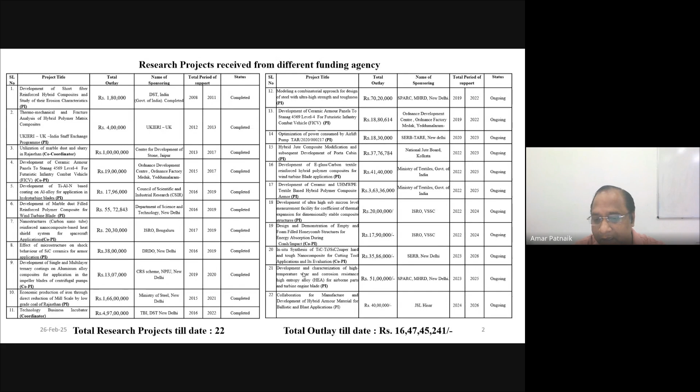Most of our work is the development of materials only. It may be defense application, it may be wind or hydro turbines, or it may be dental applications, or hip prosthetic applications, or it may be for ISRO for space blade applications. So in almost all the cases, whatever you say, these are the development of new materials. Mainly our work is the development of materials only.

So there are a few relevant projects, and we'll discuss not all of them, just I will go through it. One of them, we can say, for Ministry of Steel, that is one of the dream projects for them - it's development of iron particles, specifically nano irons, from low grade coals only, which we have developed.

At the end we'll discuss another project, that is DST, specifically for applications of SPARC, a combination governed by Ministry of Education. It's a SPARC International project, and here again we have developed some new steel material. It's a steel already there in the world, but it is a slightly new steel material, and it is more harder, specifically developed for shock absorbing applications only.

And then another application, this is for ISRO, that is for thermal measurement of conductivity, specifically thermal expansion for small samples. It's at a sub-micron level, you can say. It's very tough. We are developing that equipment in our laboratory so that it can measure the thermal expansion, and this is an ongoing project.

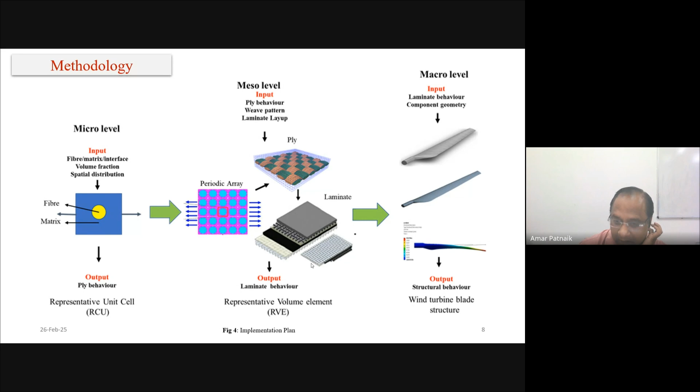It fails in terms of thermal, it fails in terms of mechanical, it fails in terms of surface, that is erosion. So these are the things we are doing in simulation also. We did it. So this is the model we have developed. Those who aspire to work in this area or are planning to apply for projects to different funding agencies should try to concentrate on these things: what exactly is going on at present and what new things we need to incorporate so that it can be an achievable project.

So we started with a model, that is an erosion model. Generally, in simple terms, erosion is a surface loss, because the surface is eroded. It's just like a sand blasting technique. So the surface is damaging. Once the surface is damaged, the failure will start from there.

Once the surface is damaged, the exact energy that is required will not be obtained. So that's the biggest problem, how we can save the life of that blade beyond the desired period. In general, in Rajasthan, the life of blades is at most 1 year, not more than that. So we have to enhance that, at least to 1.5 years, so that we can save the maximum cost. So this is the model we have developed. It is generally a kinetic energy model, because it is the impact of a particle on the surface.

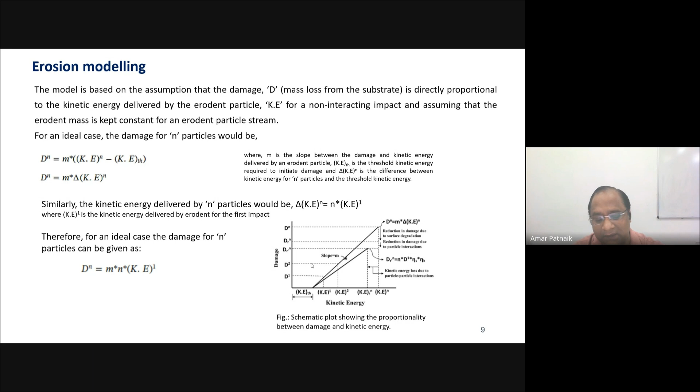So this transformation is very important to know about, specifically for materials working on energy applications, specifically on wind energy. So here the technology is that we need to find out how much it can balance in terms of the velocity as well as the particles.

So in general, whenever we go for a model in simulation, it comes one particle at a time. But in reality, it's not like that. In reality, maybe thousands of particles come at a time, or maybe 10, 20, 100. There is no limitation, and it is difficult to measure or understand how many particles are coming at a time. So in simulation, we can strike at least one at a time only.

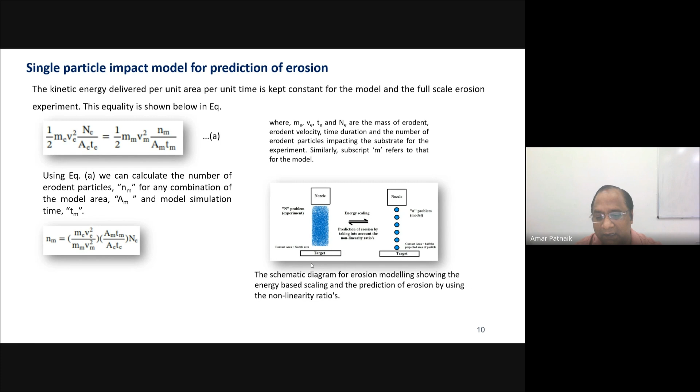So through this, we can see how the particles are striking. In general, we can consider the particle is spherical, that is a sand particle. So it strikes the surface continuously. Once it strikes continuously, the surface damage will take place. So this is one of the failure mechanisms.

There are other factors. Those who are working on tribology, they can say it is a damage. Those who are working on mechanical, they can say it's a failure of the materials. Or those who are working on temperature, they can say it is a grain effect of the materials. So the thought process is different, but the outcome is finally the loss of materials.

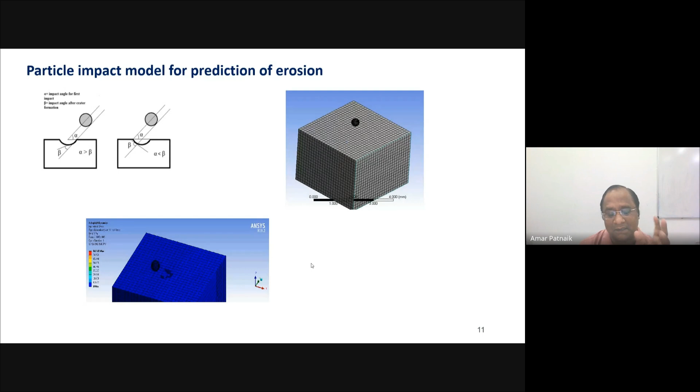We studied both experimental and simulations, and the graph pattern is exactly the same. So through that we can say that at a particular angle, the loss is maximum. What to do? We need to avoid that particular angle. Because at present the design of wind blades is not the steady type of 10 years back. At present you can automatically adjust the head of the wind blade.

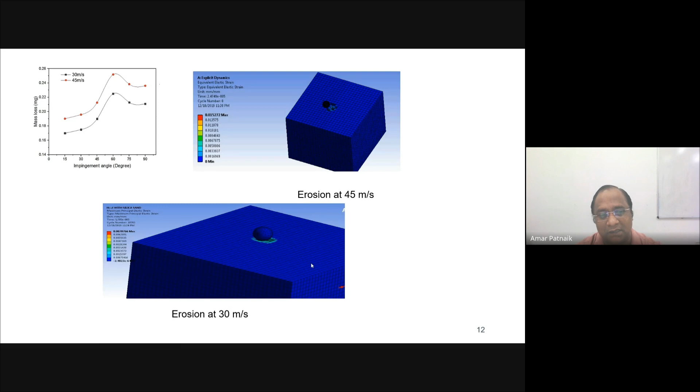So by these results, we can say that the particular angle we should avoid, so that we can reduce the damage, because loss is an unavoidable parameter. We can't say there is zero loss, but we can reduce that loss. So it is important to know which angle has the maximum losses.

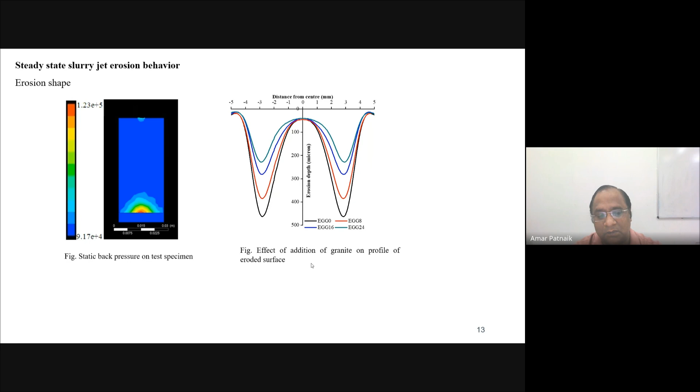So similarly, the erosion pattern, specifically for slurry erosion applications. This is one of the applications through which we can say how the graph pattern is, at which angle it is maximum and at which angle it is minimum, and where the loss is maximum. We need to understand those things. So accordingly, you can develop the material.

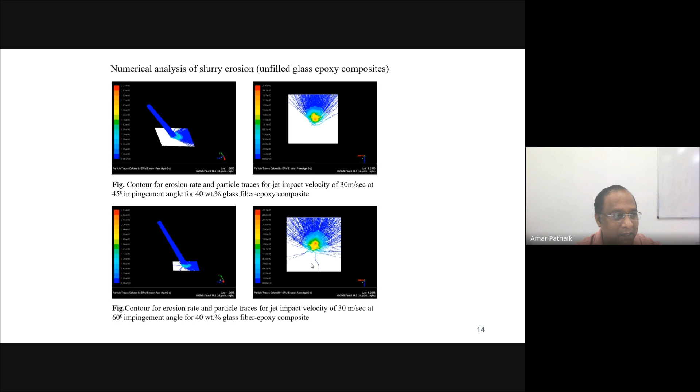Different sand particles, how it strikes the surfaces, damage is taking place. And once you know it at different velocities and different angles for different properties of fibers, different percentages of fibers, then at the end, once you optimize things, we can go for development of materials experimentally. This is one of the experimental results, and simultaneously the simulated results also.

So the same thing at a particular angle, let the angle be 30 degrees or 45 or 60 or 75 or 90 degrees, different angles. Here we observe that this particular fiber, it may be any fiber, but this particular fiber is a synthetic fiber. This fiber at 75 degrees, the loss is maximum. So these things we can study.

Those who are good in material science can study these things through a scanning electron microscope also. And the same thing we can observe with the help of simulations also, because it is not possible that the facility is there each and every time. We can do the same things by other methods, that is through simulations. So this is a valid pattern showing which angle has maximum loss and at what particular velocity, so that we can avoid that. This is totally new to the system

in case of wind applications, where most of the time we are going with a scanning electron microscope only. There we can know the surface property of the materials, how the loss is, whether cavitation is there, plowing is there, micro plowing is there, or any fracture of materials, or damage of the composite surface is there. The same thing we have observed through simulations also. That is a very good thing.

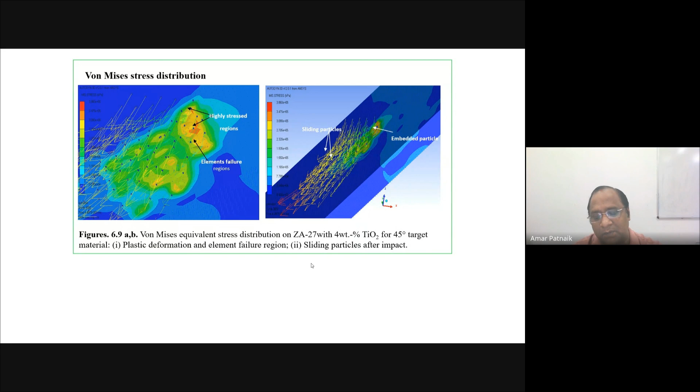Now the next project is specifically for defense applications. We'll go from here to the end. It's purely on defense applications.

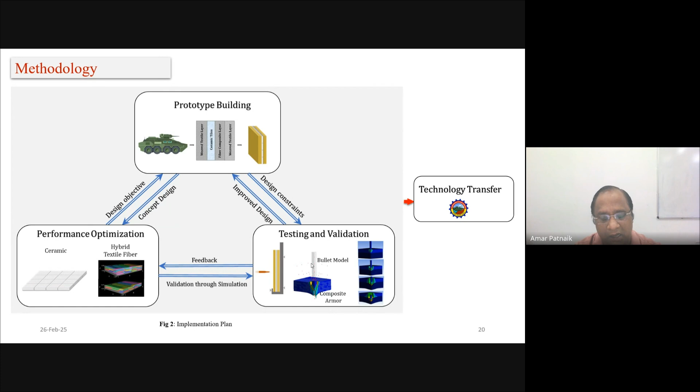So here the target is, because the Government of India's major focus at present is defense, we need to reduce the weight of the materials. Till 2010 we have developed the material. It is nearly 36 kg. We have reduced from 130, 140 kg to 36 kg. Now our target is hardly 12 to 15 kg, not more than that, by these methods only.

So this is one of the techniques. There are a lot of techniques for fabrication of materials. This is one of the techniques, VARTM, generally you can say it is vacuum assisted resin transfer molding technique. We have developed this equipment in-house here, and it will work in a controlled environment.

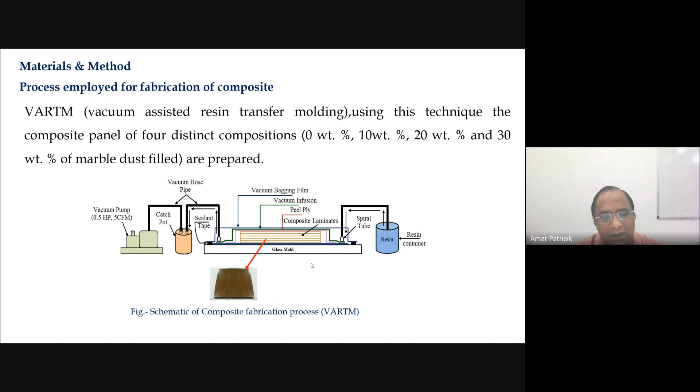That means vacuum as well as pressure. That is the controlled environment. It's not temperature. I will show you another equipment where it will work with vacuum, temperature as well as pressure. But this is only a vacuum as well as pressure environment. And we have developed this in-house for these ballistic applications only.

So these are the weaving patterns of different fibers. These are the different fibers we developed. This is the simulation. We did simulation through TexGen initially, for the design parameters. And the rest are the original weaving pattern fibers. NITRA is one of the agencies in India that is very good for weaving of fibers. As per our design, they can weave the fibers because they are a partner of this project.

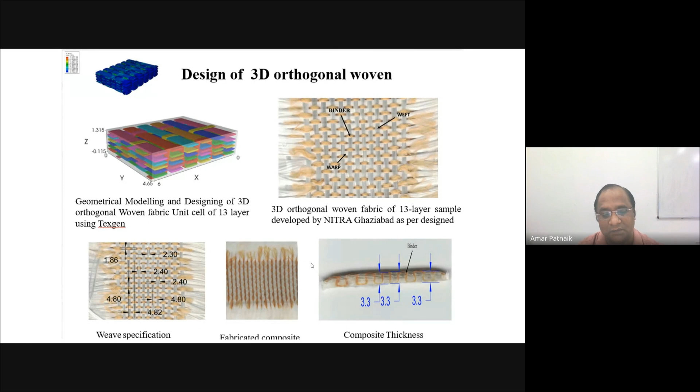And through simulation also we have studied which fiber is good in which direction, because we are taking 3 different fibers in this particular application. This is glass, carbon, and UHMWPE, that is ultra high molecular weight polyethylene fiber. These fibers are very good specifically for defense application, that is ballistic as well as shock absorbing materials. And this fiber pattern we have designed through simulations. After that, we have performed the experimental work.

So the bullet is like this. You can see the image, that is the simulated image, of how the bullet is penetrating the surface. So there are different images. We can understand through this image how much it will penetrate inside the body structure, because first of all it should not penetrate 100%, and there should be some deflection, maybe 3 or 2 mm, not more than that. This is the boundary condition.

And through this we can observe which fiber will absorb more energy, because glass is slightly different. Carbon fiber will absorb energy faster, whereas UHMWPE is late because it has an elastic-like nature. So through simulation you can understand which fiber to put in which direction.

As per our weaving pattern, carbon fiber, glass fiber, and UHMWPE, 3 things we have taken. UHMWPE we have considered as a binder, and in the X and Y directions we have selected glass and carbon fibers. And this is the weaving pattern of these fibers, so that we can understand.

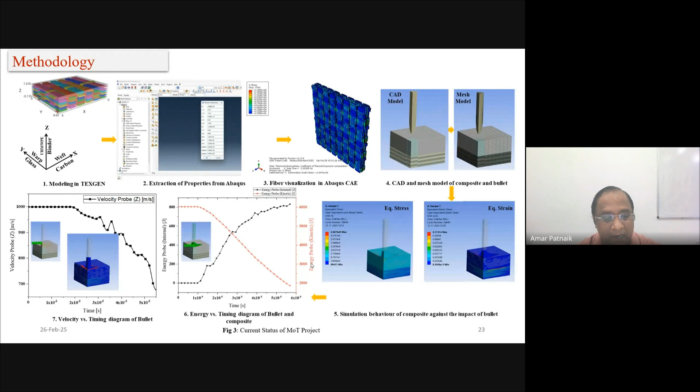So these are the different graphs, the energy versus the time, so that we can know how much time it will take to penetrate into the body of the armor panels. These are the energy versus time diagrams of the bullet as well as the composites. And these are the simulation behavior of the composite against the impact of the bullet. You can see that only the surface is slightly damaged. It's not like it will 100% penetrate into the body of this armor.

So similarly, whenever we go for this type of research, we should know the behavior of the bullet materials. Generally, you can say these are FP bullets. And here, see, we have started with different combinations of fibers: glass, carbon, UHMWPE, and glass, carbon, UHMWPE in reverse. So nearly 9 different permutations and combinations we have performed.

And here, what is the benefit of it? The most important is the cost benefit analysis. So the benefit is that we can improve the efficiency, because impact energy is the major factor as far as ballistic application is considered, and simultaneously we can reduce the weight of the materials. That is more important, how you can reduce the weight of the armor so that someone can easily hold it and keep it there without a crane. So if it is 12 or 13 kg, anyone can hold it and keep it, because there are holders in 4 positions: left, right, front and back. In that holder we can keep the armors.

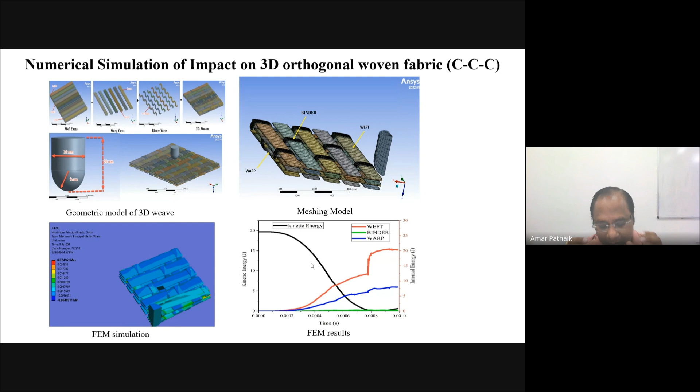This is how the armors are looking. And there are different combinations. You can see the total kinetic energy and the individual ones, the binder, which one is better, and the warp internal energy. For all these, we need to find out the energy first. Through this energy, we can say whether XYZ fiber is good or bad. These are all simulated results. This is not experimental.

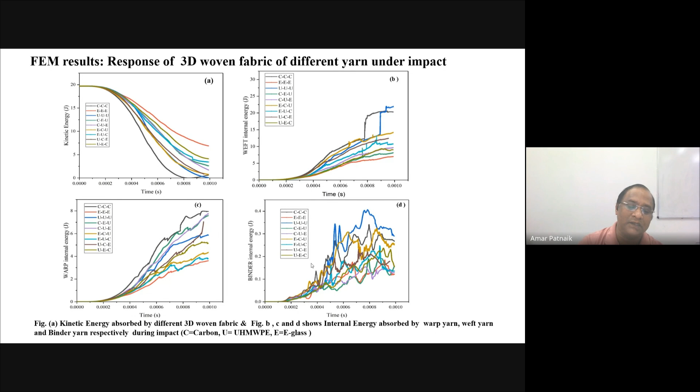See the combination CCC, which is carbon, carbon, carbon: in the X direction carbon, in the Y direction also carbon, and in the binder direction also carbon. Like this EEE, glass fiber, glass fiber, glass fiber. UHMWPE, U. And carbon, E and U. Like this, there are 9 combinations. Through these 9 combinations, we have to optimize which fiber we should keep in which direction.

So we ranked them through a hybrid optimization technique, TOPSIS, which is one MCDM technique, a multi-criteria decision making technique. Through this technique, we have optimized the data. We have taken the weaving pattern of the fibers, simultaneously their energy, that is how much kinetic energy is absorbed, as well as the warp internal energy, binder internal energy, and the property of the material, that is the density of the warp, density of the weft, and density of the binder.

Density is one of the major properties as far as composite is concerned. If it's best fabricated, there is a free structure, meaning there is no failure or porous structures in the material. That's the reason we need to consider density as one of the measures.

There are other factors too. It's not like density is the only one. Other factors like hardness we can also consider, some mechanical properties we can also consider. If you think about this particular armor, if I can use it in minus temperature, then we can take temperature as another factor.

But as this is totally designed for the Indian environment, we have considered only up to temperature up to 60, not more than that, because more than that is not required. So this is the environment we have optimized on. In these combinations, below the graph we can see that UHMWPE is the best, that is rank 1. Then carbon, carbon, carbon, then other combinations are there.

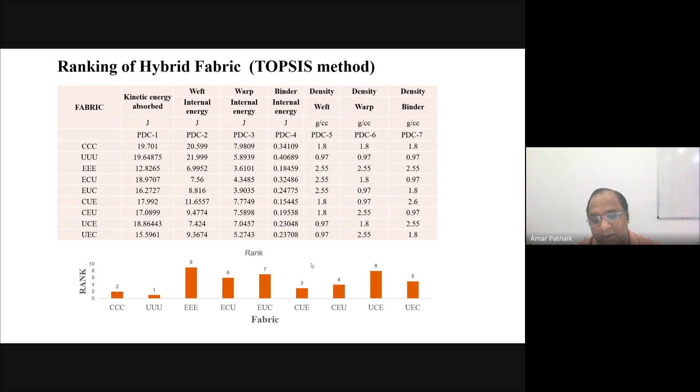Similarly for polymers, one of the basics is curing, which is important, because if it is not cured properly, there are chances of failure of materials. One of the failures is because it is a combination of metal as well as ceramics, so there are chances of failure by delamination. So to avoid these things, proper binding is also important.

That's why this equipment is available in our laboratory, and through that we can apply high pressure, high temperature, nearly 200 degrees centigrade, as well as load. Here load is pressure only, there is nothing like manual load, we put it in a vacuum environment with pressure as well as temperature only.

It will cure for 12 hours or more, based upon the curing of the resins, because some resins may take 3 hours, some may take 4 hours, and some resins may take only half an hour. So we need the duration to generally be more, so that it can properly mix, and we can prepare it finally. So this equipment is generally what you can call an autoclave.

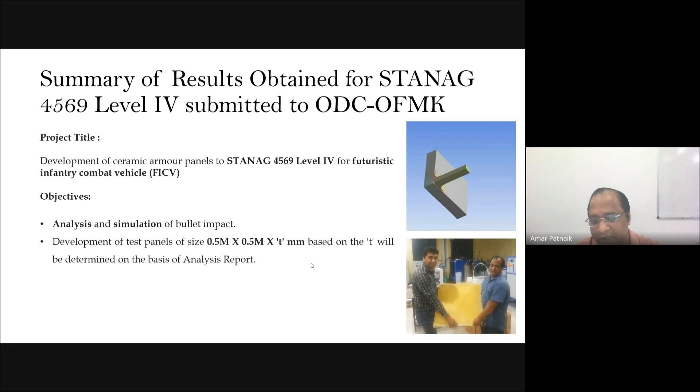Specifically, the material is what we have developed here: pure glass and composite, along with the ceramic, which we have considered as alumina, and some others. This is the bullet we have used for these STANAG applications, a 14.5mm API bullet, the B32 series. Our ceramic is Al2O3 ceramic, along with a glass fiber epoxy composite.

This was our first project, from 2015 to 2019. We worked on this and gave a positive response and results to them. This is totally a weapon application, meaning directly for vehicles. It's not like we will go for some other test; these are already tested materials, specifically for Level 4.

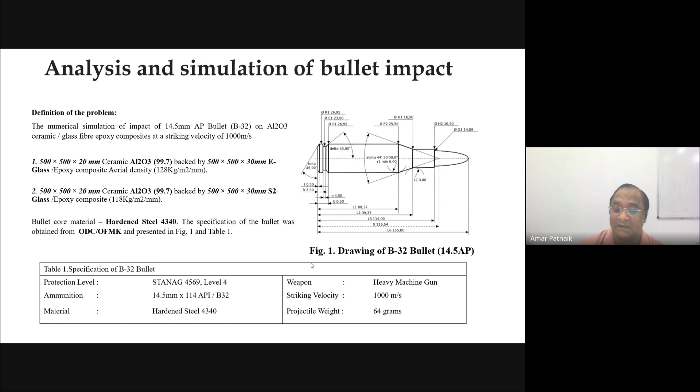The projectile weight is 64 grams, and the striking velocity is 1000 meters per second. These are the models we developed initially.

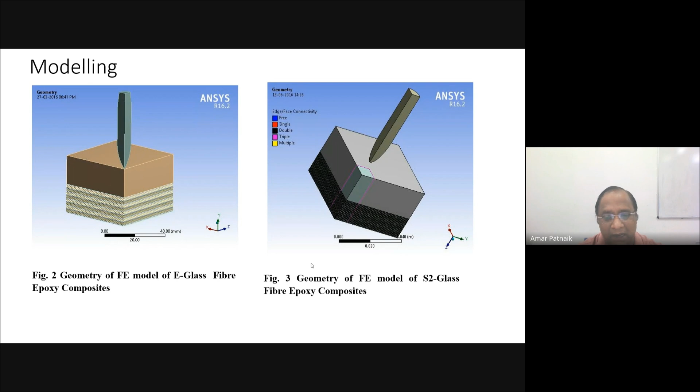These are the geometrical models, using e-glass fiber epoxy composite. Through simulation we can do nearly 70 to 80% of the work. So one should be very strong specifically in simulations, because cost and time are both important. Through simulation, I can reduce the cost as well as time, and also understand the behavior of the materials in everything.

Accordingly, we can understand where I need to put my material. It's not necessary that every time I will go with D as 0 or D as 1; D may be between 0 to 1, but the damage pattern variable always lies between 0 to 1. So this is a linear equation of state, and it satisfies Hooke's law also, because anything we develop should satisfy our basic equations.

Similarly, this is a shock equation of state also. Once it strikes the surface of the ballistic material, we can understand how much shock energy it will absorb. That's why we use the shock equations of state, through which we can understand how much it entered into the armor panel, how it strikes and reverts back, and in some other directions. We need to know this, so we use this specific equation.

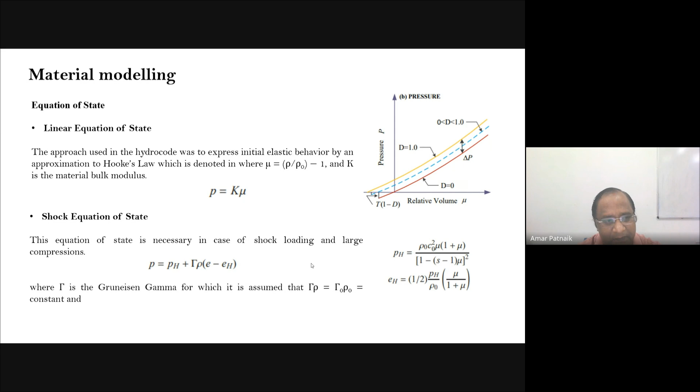Similarly, these equations are all material models, because in simulation there are the material model and the failure model, two things. There are different material models; one can find out the material model through the linear equation of state or shock equations of state.

Again, the materials model only, but we need to find out the strength also, because that will feed into the previous two equations, like equation of state and shock equations. That will determine the damage behavior of the materials only. Damage is one of the parameters.

These two equations, Johnson-Holmquist 2 and Johnson-Cook model, both are strength parameters. Whenever we go for tensile strength, we need to know how much tensile strength, flexural or bending strength, interlaminar shear strength, or impact strength the material has. Similarly, for ballistic applications, these strength models are there. No doubt it is an empirical model, but...

Nearly you can say that if your model is perfect, CAD design is perfect, nearly 95 to 100, nearly 99.99% accuracy you will get if the materials model is perfect. Otherwise, because there are different ways to model the materials. If the material model is perfect, then it is easy to understand the behavior of the material.

Otherwise, it will fail 100%, because if the CAD model has some defects, or the proper boundary condition is not there, or the nodes and elements arrangement is not proper, it totally depends upon that, because ANSYS is a black box. It could not understand anything on its own. The way we arrange it, it can understand things only. So the CAD design is important.

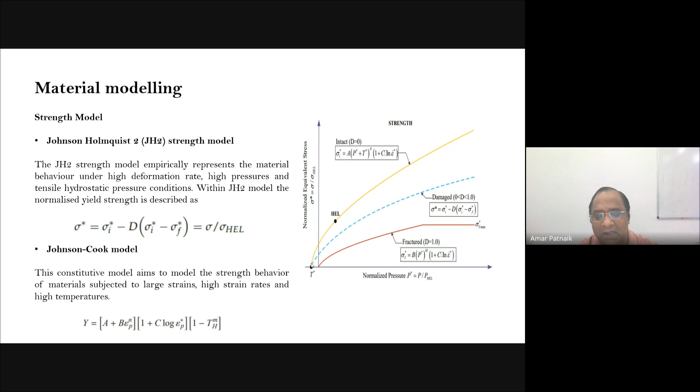So in strength, how will we calculate it? If it is the red line, it is a fracture, or it is damaged, lying between 0 to 1, maybe 0.7, 0.3, 0.5, or it is D=0, then you can say it is intact. These are the three things we can find out through this materials model.

Similarly, a failure model is there, because once you know the damage of the material, then through failure models, which is an advanced Johnson-Holmquist model, we can find out the failure of the materials. It is a graph between the pressure as well as the fracture strains only.

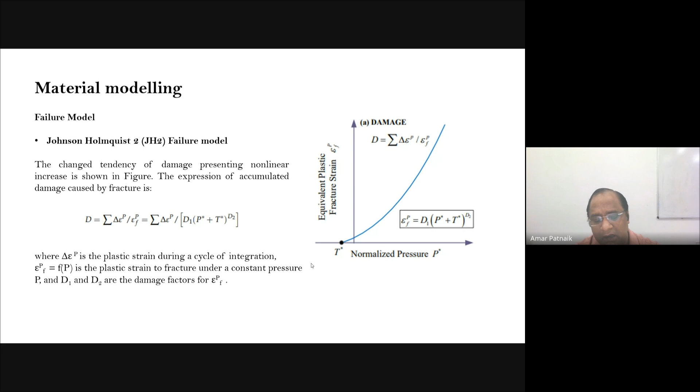And the tendency of the damage, we should know, depends on the behavior, just like whether the projectile impact is at a 45-degree angle or 30-degree angle. So it depends upon that only. We can find it out totally based upon the plastic strains only, that is the strain energy principle. This is the failure models of different materials.

Similarly, failure models, not necessarily I can go with just one, so here is the Johnson-Cook failure model. This type of graph we already learned through material science, that is whether a material is brittle or ductile. The graph is like this only, this is the Johnson-Cook failure model.

If it is up to point A, then damage initiation is there, then damage evolution, and finally it fails completely. That is through the strain versus stress curve only. So we can find out the behavior of the material.

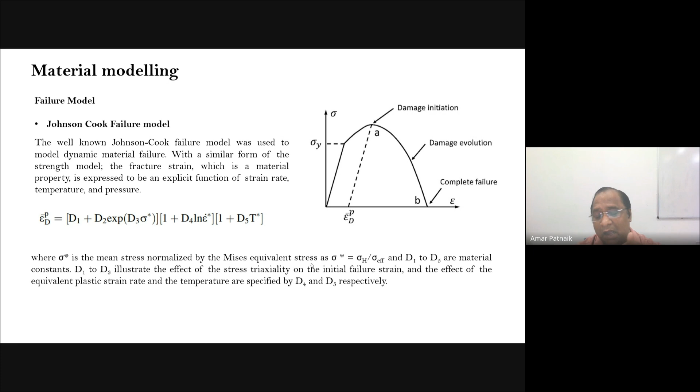Through that we can say this graph can explain what further modification is required in that material. That is more important, how you can modify that material. If it reaches damage initiation and there is no further growth, it's okay. Then damage evolution is there, then complete failure is there, then we need to rethink how we can change the materials or the behavior or the applications of the materials.

So these are the tested results. The top left one is the panel we have developed. All top three we have developed in our laboratory, and we have tested them in the Ordnance Factory Medak. And see, they struck the surface of this ballistic panel multiple times.

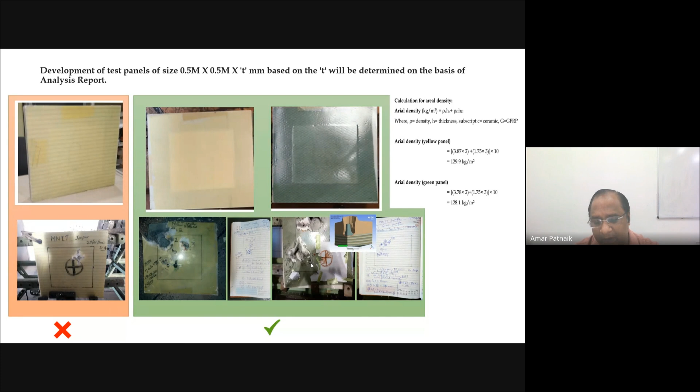The main point is that whenever anyone works on this particular type of material or this type of application, one should know the density. Here the density is the areal density. We need to find out the areal density, because ballistic applications depend only upon the areal density, no other density. Based upon the areal density, I can say which is lighter and which is heavier. So their calculation is only in terms of areal density.

See the green panel, the areal density is 128.1 kg per meter square, and for the yellow panel it is 129.9. So the areal density of both panels is nearly the same, but the materials are different. One is the green panel and the other is the yellow panel. The materials are slightly different, but the areal density is nearly close.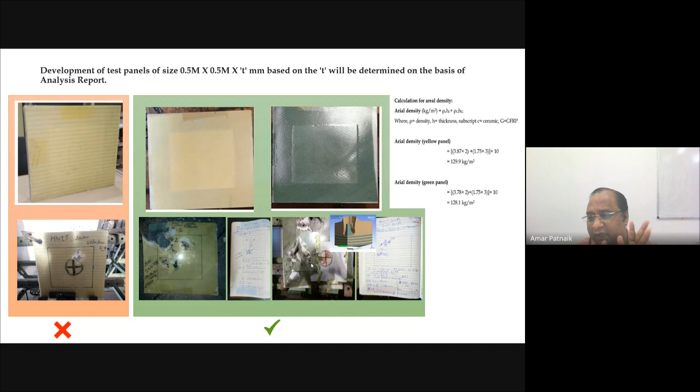So this is again through this test: we have developed a panel of B4C, that is boron carbide, and Kevlar fibers.

See, that's because I am not feeling well also.

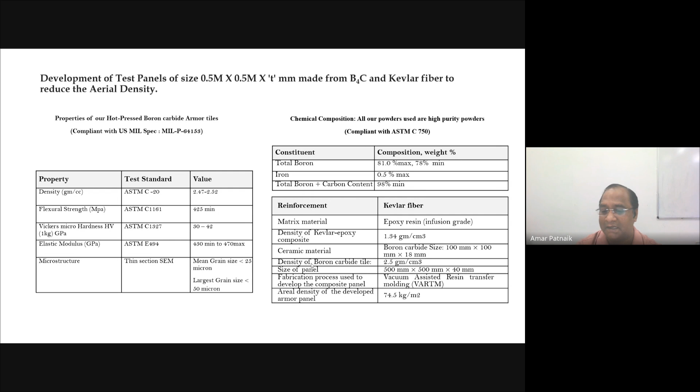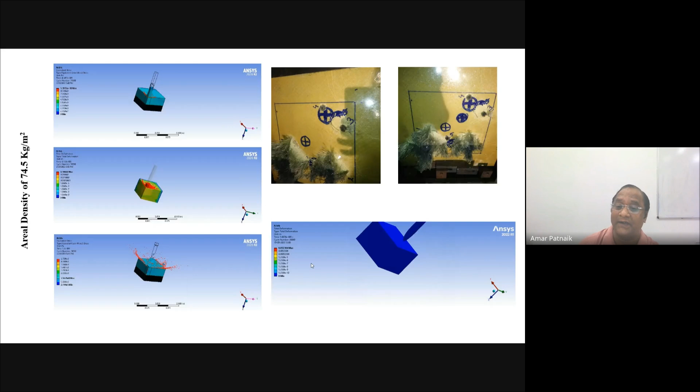The ceramic material we have considered is boron carbide, the size of the panel is 500 by 500, and the areal density is 74. See, in the previous one the areal density was 128. Now the areal density is 74.5. Further, our target is to reduce that areal density. So these are the different experimental results.

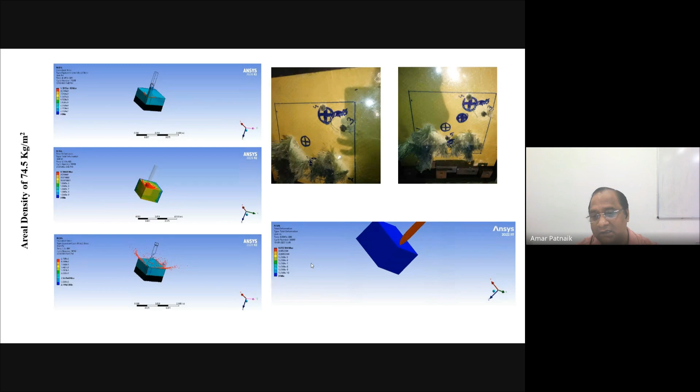The right hand side both are experimental results, and the left hand side are the simulated results. We need to validate somewhere; the experimental results need no validation, only the simulated results have to be validated. So we have validated that it is exactly the same as what we predicted through simulations. And these are the real experimental results. So there are other applications.

Once we can develop a material for ballistics, I can use it in some other applications also. Why I said it is an initial solution for sustainable ballistic or defense material: the reason is that at present, the Government of India is working in these 4 areas only, specifically the development of material.

There are thousands of areas, but as far as armor is concerned, first the helmet, because this is another important part. It can sustain -65 to +60 temperature. So development of helmets, and then body armor; people are specifically working on body armors. And this is a ballistic panel, what we have developed, the ballistic application, and last is the military vehicles.

So these are the 4 areas open. Anyone can work in this area, and we are there to support if any help is required. These are the 4 areas as far as the development of material is concerned. If anybody is working on this, then they can develop it.

With that material they can apply for a project and get funds from different funding agencies, not necessarily textile; it may be DRDO, it may be ISRO, it may be NRB, or it may be BARC also. All are working on this. There are different aspects.

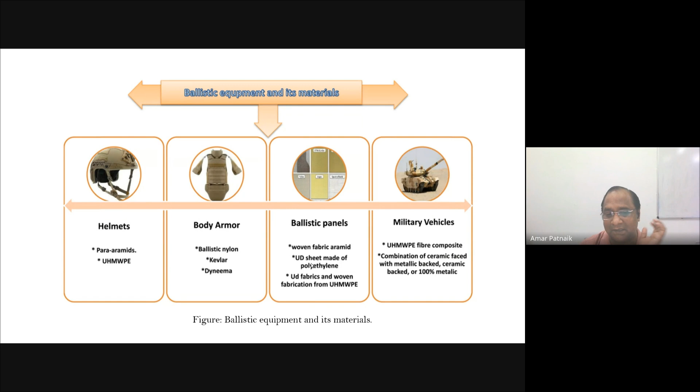So this is another project with the industry. With one of the industries we are working on this project. It is for level 3 vehicles, that is NIJ level 3. So these are the conditions, the test range. One should know the test range. This document is available in the open market also.

So we should know that if it is a type 3 armor, then the test cartridge, the test material, is 7.62 x 51 rifle, the bullet weight is 9.4 to 9.6, and the reference velocity is nearly 850, that is 847 plus or minus 9. And the shots per panel, one should know it, that is very interesting: a minimum of 6 shots is required. Without 6 shots, this material testing is not valid.

So we should know the code also, that is the NIJ level 3 code. Let's say NIJ level 4, it requires 1000 meters per second velocity. NIJ level 3, nearly 850 meters per second velocity is required. And a minimum of 6 shots is required.

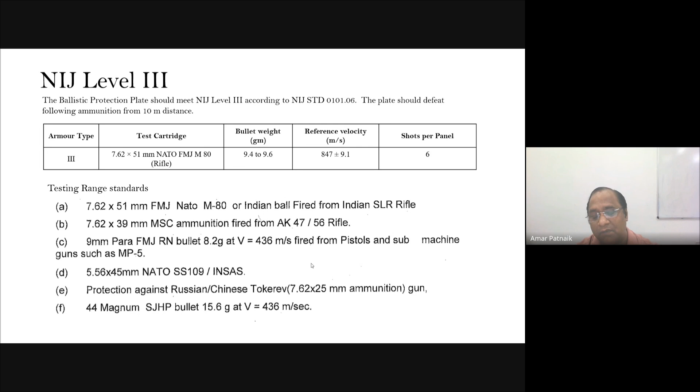So like how we are developing panels, there are other groups also developing panels for different levels. What we are developing is level 3 as well as level 4 only. See this, these are the testing conditions, how we will test it, and these are the available literatures also.

From the gun barrel to the target, what should be the distance, and how the bullet will go through this path, and how we can capture the image of this. So this is the complete setup, so that we can understand and see the things, from the bullet, that is the test barrel, to the target armor panel.

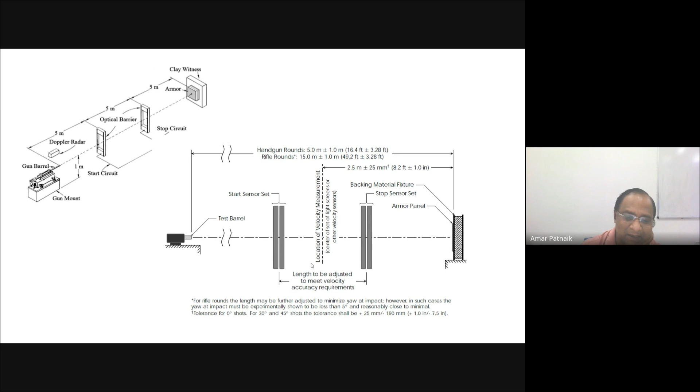See this one, generally it is measured from center to center. So here, as you see in the results, for rifle rounds it is 15 meters, and for handgun rounds generally 5 meters. That is a different criteria. Accordingly, they strike the target armor panels. So this is level 4.

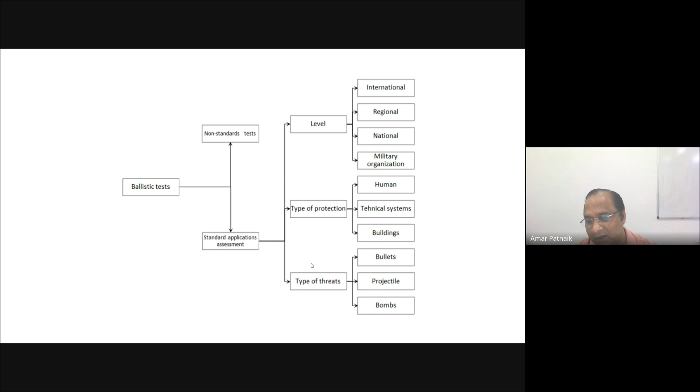That's why I felt that it is not necessary to go with this one, but otherwise we are working on this also. So there are different testing of materials and different equipments, so that we can understand. So it's not that easy. Whatever tensile test we are doing, it is not the same. So here the tensile test is HNS,

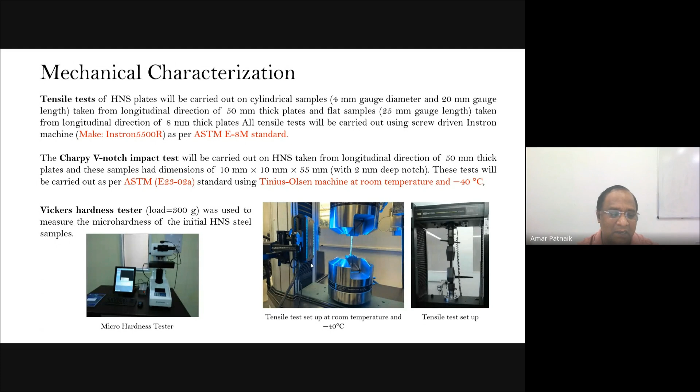this is a plate we are doing, and this test is available in our laboratory, in the institute. And these are the tests. And the V-notch impact test is the Tinius Olsen one, because we have to study all these things experimentally. These results are for high nitrogen steels only. This is the application we are working on with Jindal. It is high nitrogen steel only.

This is one of the tests so that we can understand the quasi-static, that is a compression test, and another is the SHPB test. It is like tensile, but at a very slow range, and simultaneously we are maintaining the frequency level. In general, such equipments are very costly. This is not available here; it's available in other parts of the country.

That is SHPB, the split Hopkinson pressure bar test. Most of the laboratories don't have this equipment. We have to test through that, so that we can find out exactly, because it is a high strain rate test. The tensile test doesn't come under this category. Room temperature, high strain rate compression test. Through this we can find out the compressive strength, because there is tensile and there is compressive. So this is a compressive test.

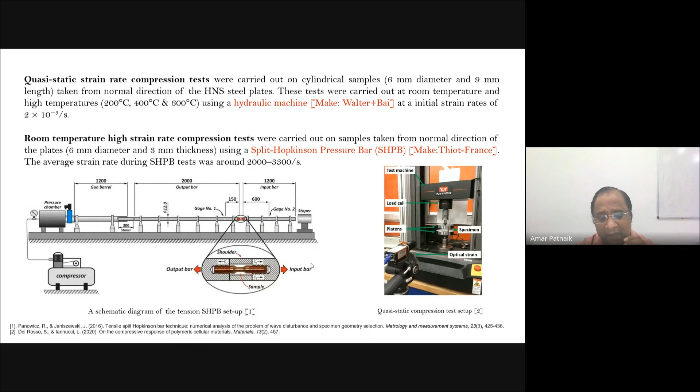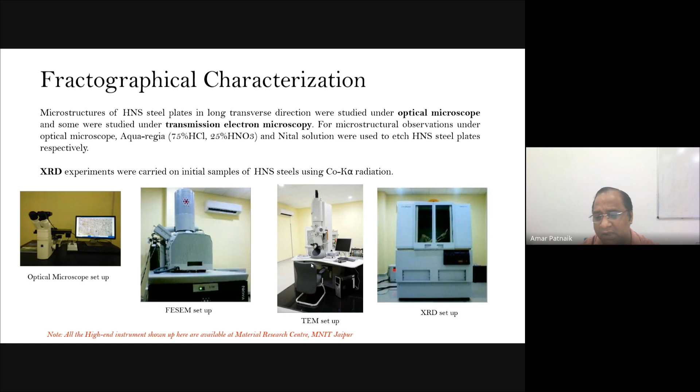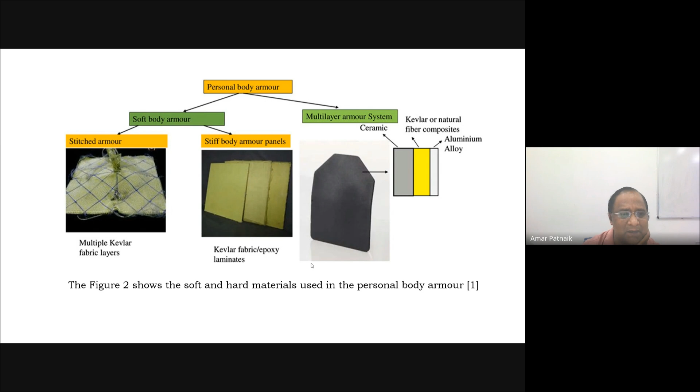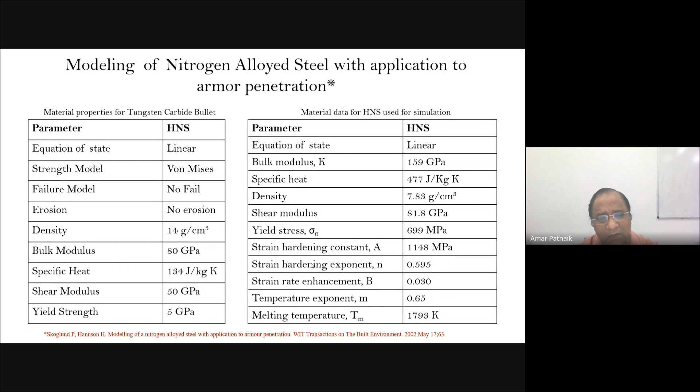And these are the different body panels we have developed. So now see the results. This material was developed by one of the renowned industries in India, JSL, that is Jindal Stainless Steel. It is high nitrogen steel, and they use it for other applications, but also for ballistic applications. So we have taken these materials from there, because we are working with Jindal.

Our target is it should benchmark with level 3 and level 4. So we changed it. Initially it penetrated completely, entered and came out also, because it 100% penetrated into the body structure of the high nitrogen steels only. There is no composite there; only the steel material we strike first, so that steel material only will be put inside the composite. So these are the things.

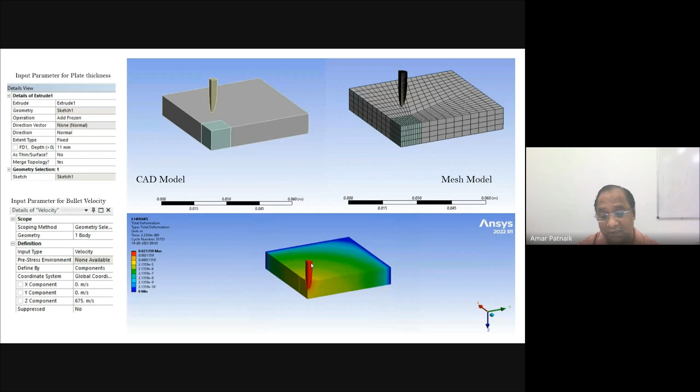So like this, there are different boundary conditions we have studied, and we came to know that, see this image, it's not 100%. It means it's just come out. So slightly we have modified the property of the materials, and even the thickness also, because thickness plays a major role. Thickness also we have considered as far as our experimental condition is concerned. See there again, in all the cases there are only few parameters we have changed and a few parameters we have fixed, so that the different options will go, and then you will come to know at the end.

See this one also, how it is. See, just by changing the thickness slightly, it completely fails. So based upon that, we prepared different combinations. How can you prepare it? These are experimental conditions only, based upon the areal densities, how we have prepared.

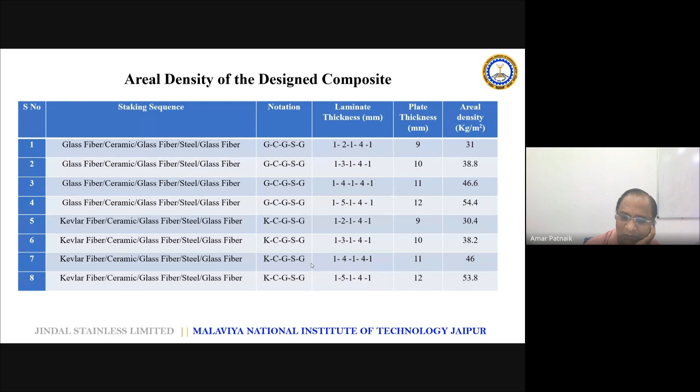Rest ceramic and steels are there, but we change the fibers, that is Kevlar fiber we have taken, and same we have taken carbon also, and UHMWPE also. By changing the fibers, the weight changed, but we have to compromise somewhere, where to stop. So these are the different combinations we prepared, and one by one the results we started. That is the 7.62 bullet.

It is because it is a standard level 3 application, and the panel thickness is 10 only, with glass fiber, high nitrogen steel HNS, then glass fiber, then boron carbide, and then glass fiber. Like these combinations we have arranged. Accordingly we started the simulations, because these combinations came through literature as well as past experience, because we have already used boron carbide, glass fiber, and other fibers also, but we never tested a high nitrogen steel.

So we thought we should keep high nitrogen steel at the top and boron at the bottom. Reason is that if steel fails, then boron carbide ceramic is there, it can protect it. So based upon that plan, we kept the base as boron carbide, and the front we kept high nitrogen steel. Otherwise, if I take only high nitrogen steel of 10 thickness, that weight will cross more than 100 kg, depending upon the armor sizes, 500 by 500. But this will hardly come to 18 kg only.

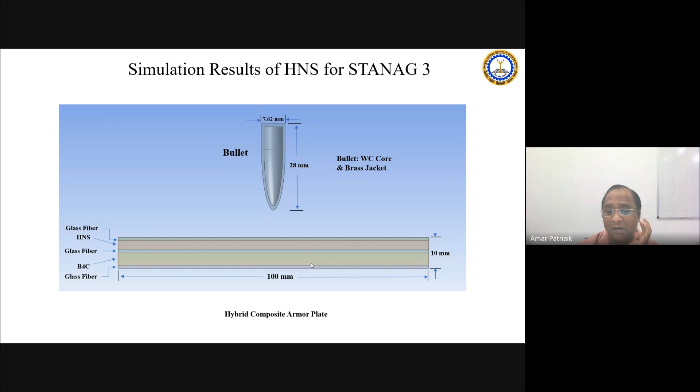See the structures, how the results are, and how the damage pattern is. That is glass, steel, glass, carbon, glass, like this. This is the pattern. And the impact velocity, or we can say muzzle velocity, is 930 meters per second. It is through simulation only.

And so through different combinations we changed it, because with 9 the damage is slightly different. Then we have gone to the 10 thickness, and here it is again the same condition. Muzzle velocity is the same 930 meters per second, and the same combinations are there.

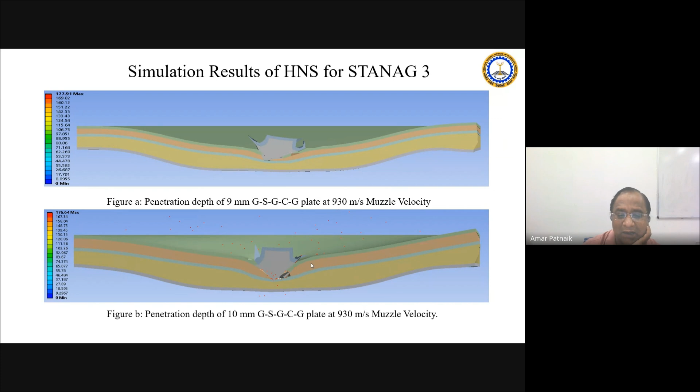Only slightly we have changed the thickness, and we have observed how much damage there is. See this one again. We have taken Kevlar, steel, glass, carbon, glass, like this combination, 9 thickness. Totally, how the damage pattern is there. Totally it is damaged, but simultaneously its areal density is also high. This is the pattern of the penetration depth of it.

And again we have taken a 10 thickness. Again same conditions, same 930 meter per second muzzle velocity. The top one totally came out, and the bottom one slightly survived, but it is penetrated. So like this, different combinations.

See these combinations. Through that I can say that at the end, without simulation, nothing. These studies, particularly whenever you go for high-end applications, simulation is mandatory. We are hardcore experimental, but we are doing simulations, because through simulations I can optimize the whole process. So that is the important data.

See, this is 11, just 1 thickness we have changed, and the velocity is 850, and 1 mm. Then we have again increased it another 1 mm, that is 12 mm thickness. And see the damage. Before, how the failure is at 9 and 10 mm. Only 1 mm thickness affects how much. And simultaneously the combination of that.

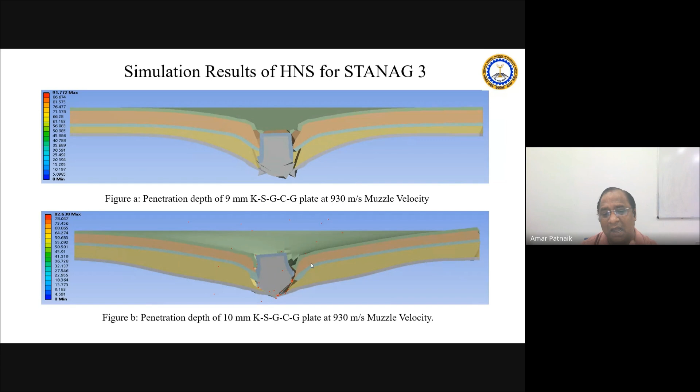Combination is important. In the back one, the combination is Kevlar, steel, glass, carbon, glass. And here it is glass, carbon, glass, steel. Like this, carbon is here. Either we are putting the ceramic or we are putting the fiber and ceramic combination. So we have taken here only the ceramic. We kept glass on top, the impact side, then ceramic, then glass, then steel, and at the end is the glass.

So the ceramic and the carbon is a combination in that. Either you go with ceramic with carbon or else you can go with the ceramics only. Only thickness is the factor, means how much thickness we have to manage. So with that thickness, see here, only 11 mm and it is protected. It damages on the surfaces only, but it will never penetrate.

Only the below one, the deformation is important, because up to a certain deformation it is allowed, as per the guidelines, that is STANAG guidelines. As per the guidelines, for vehicles up to 2 mm is no problem. For the human body, 0.5 or 1 mm deformation is okay.

Otherwise, if it deforms more, then it will strike the surface. No doubt the bullet will not penetrate, but there is surface pain. So that also we need to work on: let it not penetrate, it's okay, but there should not be maximum deformation. Through simulation the pattern is like this, but it's a hard mixture.

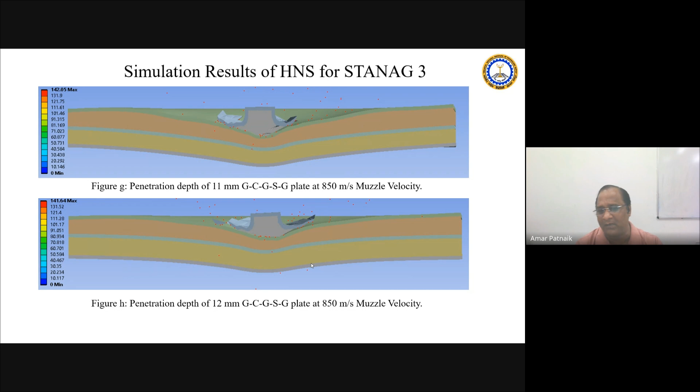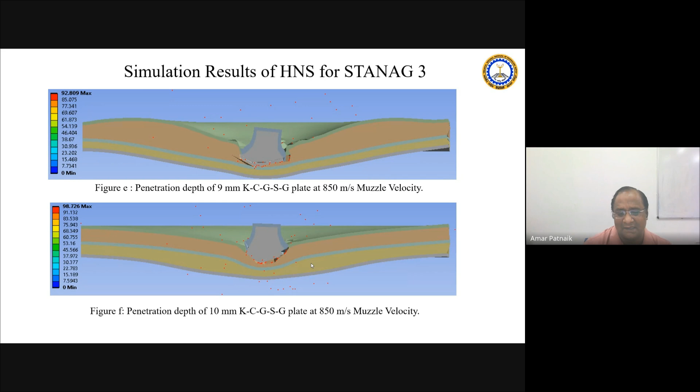You can say 1 or 2 mm deformation is fine for vehicles. There is no problem at all if it deforms 1 or 2 mm without penetrating. See here again another combination, that is Kevlar, carbon, glass, steel and glass, and this is again another combination, 10 mm thickness, like this.

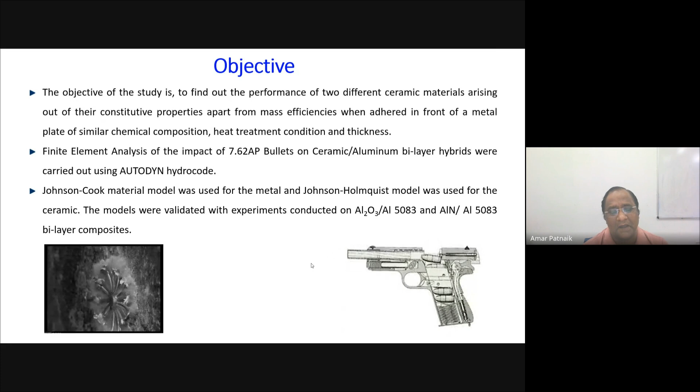Bullet on ceramic as well as aluminum bilayer hybrid were carried out using Autodyn. We have used ANSYS. These are ANSYS parts: ANSYS LS-DYNA, ANSYS Autodyn. So another part of ANSYS is ANSYS Autodyn. It is also very good software, and very flexible to use.

So what we have studied initially, we have prepared the ceramics. Just see, the center point is the ceramic, then the periphery is the composite. It's a slightly different design.

At the periphery we have prepared composite to hold the ceramic. We designed it so that the ceramic doesn't need to be a full 500 by 500 mm piece, because the bullet will always strike the center, not a corner. So that center part needs ceramic protection, and the rest is composite only, matching where the bullet is expected to strike.

This is the design only, and this paper has already been published in an International Journal, along with some geometries and finite element conditions.

These are 8-node brick finite elements used for the projectile geometry, and the target bodies have about 1920 and 123,472 nodes and elements respectively.

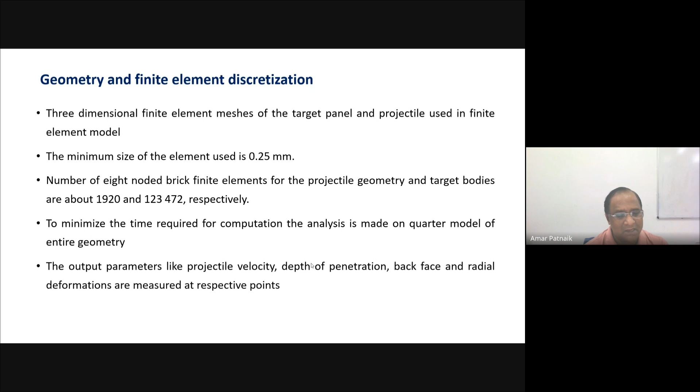Our target here is to minimize the time required for computational analysis in building the model. The output parameters we considered are projectile velocity, depth of penetration, back face deformation, and radial deformation, which we measured.

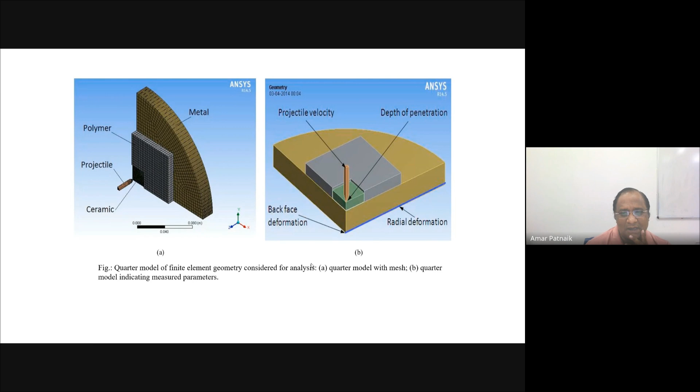This one shows the simulated results only. These are all simulated, and I will show you the experimental results also.

What we faced when we started this work around 2013-14 was a lot of permutations and combinations, because the back face deformation, shown here as the blue line, is very important. If a bullet penetrates to a certain extent it's okay, but initially we observed that although the bullet did not penetrate the body, the ballistic material deformed nearly 6 mm or 8 mm.

So this is very dangerous in nature. The deformation should not cross more than 2 mm thickness.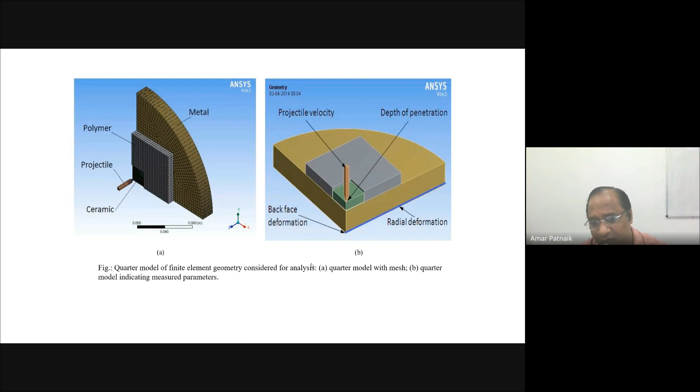We worked on this for more than a year and finally concluded what exactly was required in the design, because everything else was the same - the fiber, the composite, the ceramic were all same. Only the arrangement differed: how we arranged the laminate sets, how many layers in the back plate versus the front. That combination took a full year to understand.

These are the different boundary conditions we observed - the curved surface of the metallic back plate is constrained to move in any direction using the fixed support only. We tested at 840 meters per second.

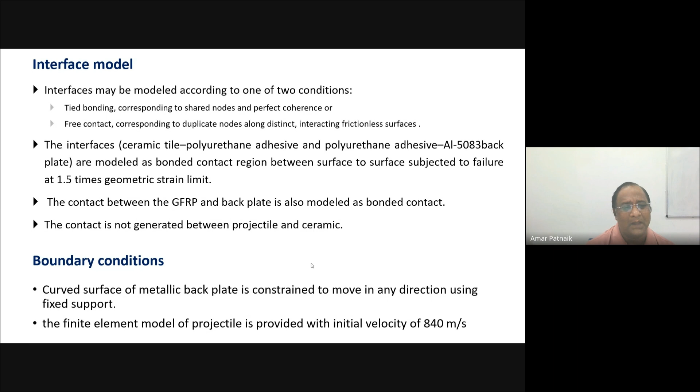We used aluminum 5083 for the back plate, along with various other boundary conditions.

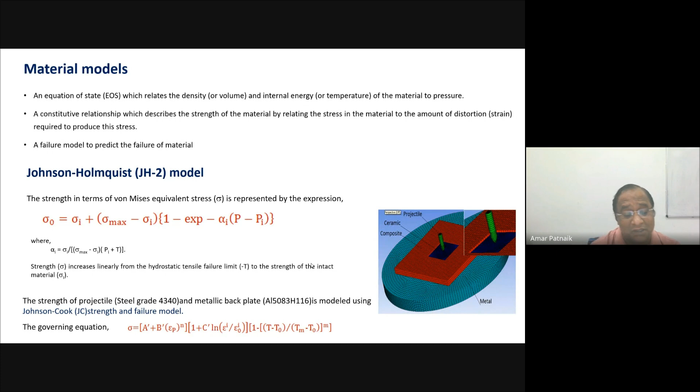Again, same material models as shown before. Every time you develop something in simulation, you need to study its physical property, mechanical property, and failure property, as well as material property. Material property is very important so we can determine which type of material is suitable for which application.

Through experiments we determined properties for Al2O3 and aluminum nitride, and we need to know which equations to use. If it's a ceramic, we use polynomial type equations. For strength and failure we used the Johnson-Holmquist model. If it's steel, we considered 4340 steel, and there the equation is linear.

All of this comes from literature only - it's not that you can simply take any material tomorrow and use any equation. If it's a ceramic, it's a polynomial equation. If it's polyurethane resin, it's a shock equation. If it's steel 4340, it's a linear equation. If it's aluminum 5083, it's also a linear equation. The equation of state helps understand damage, while Johnson's models help understand strength.

So Johnson Cook model is for this steel as well as aluminum. And for failure, we can say that Johnson Cook as well as hydro, another model. These are all theoretical as well as empirical models. It is a theoretical model and simultaneously we can say it is an empirical model also, and gives accurate results. As I said, if our model is perfect, the CAD design is perfect, node and element arrangement is perfect, then 100% we will get accurate results. That is the more important case.

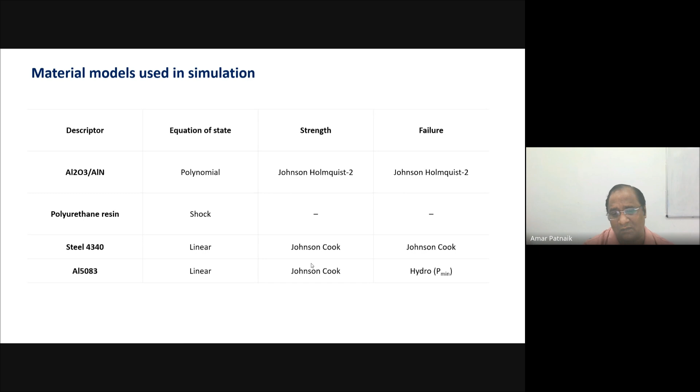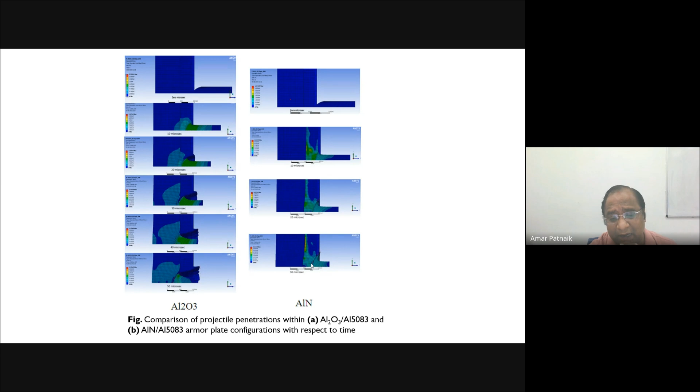So we should know really how much time it will take to penetrate, because it will penetrate gradually. It's not like we will strike and then it will go - as we are saying, the material is sustainable. Definitely it will take some time to penetrate. So that penetration depth and the time, that is more important as far as the ballistic application - how much time it will take. So at maximum, it took 50 microseconds, whereas if I go with aluminum nitride, only 30 microseconds.

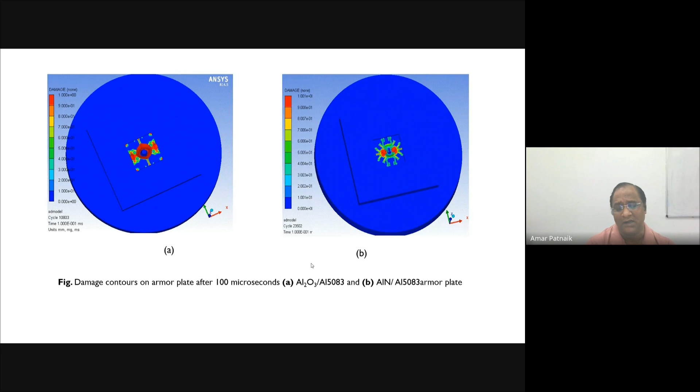After that it stops, meaning the bullet fails. As far as Al2O3, it required 50 microseconds, whereas aluminum nitride required only 30 microseconds, and we performed the same experimentally also. So these are the damage contours of the armors for 100 microseconds - aluminum Al2O3, aluminum 5083, and aluminum nitride. This is a combination of armor panels. Nobody will go with single or virgin materials only. So we always need to go with some combinations so that we can reduce the cost and improve the performance. That is the more important thing.

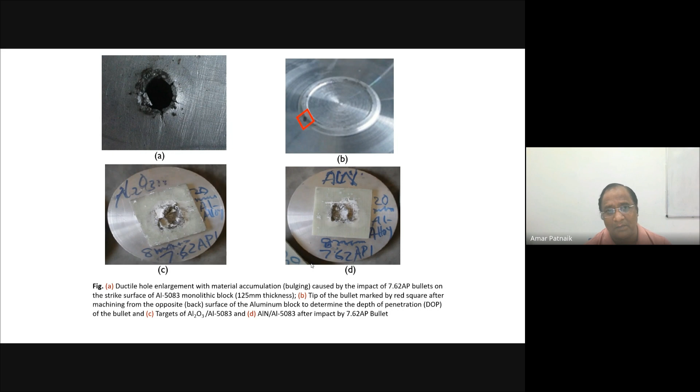Aluminum 5083 is the base material only, and the composite we have kept on top, that is just to hold the materials - hold the target armor. Otherwise this polymer has no role as far as this is concerned. Because initially we started with ceramics, then we moved to composite, and now composite with ceramic, and now we have shifted slightly towards metal, because a lot of steel industries are there in India. Their argument is why go with ceramics only, because we are not developing our own ceramics, we are generally purchasing. So as a lot of steel industries are there, why not go with steels only? So what we said is we have compromised with ceramic and steel - half ceramic and half steel, so that it can survive.

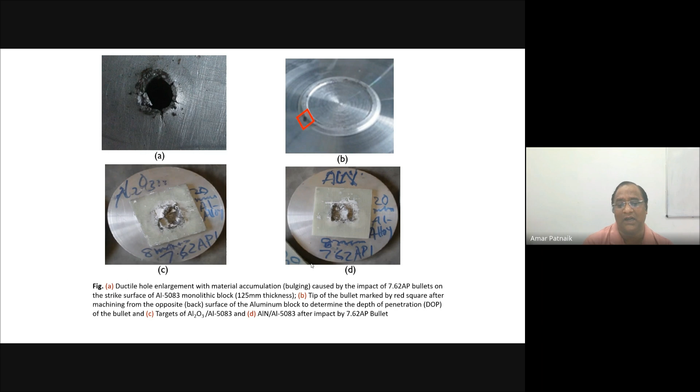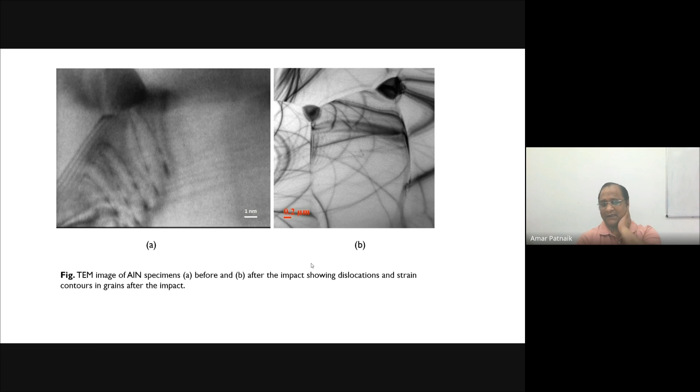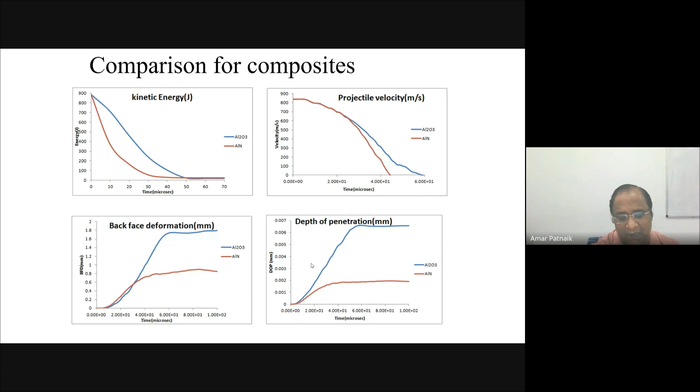All these things we have calculated experimentally. These are all experimental results, and this is a comparison between the two materials, Al2O3 and aluminum nitride. This is where we began, and I have shown the result at the end.

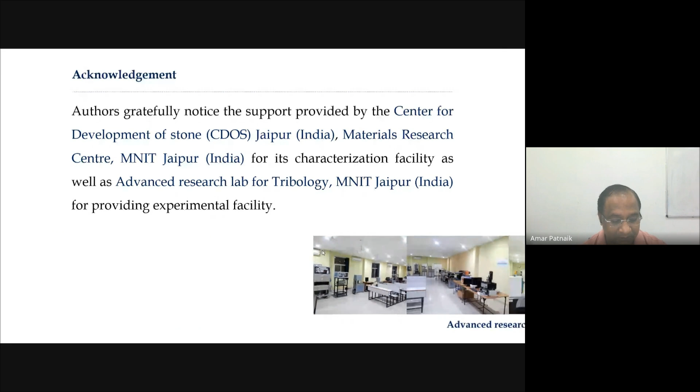This work is totally our research only, so why I have shown this - otherwise I could show something else. Because I am interested that people should work on defense, only because of that reason I have shown these things. Otherwise, there are a lot of results I have to hide. I have hidden a lot and told some. It's difficult to say each and everything, so now it is open.